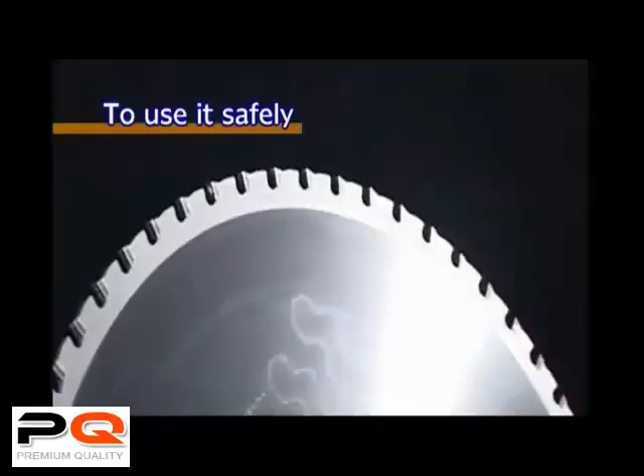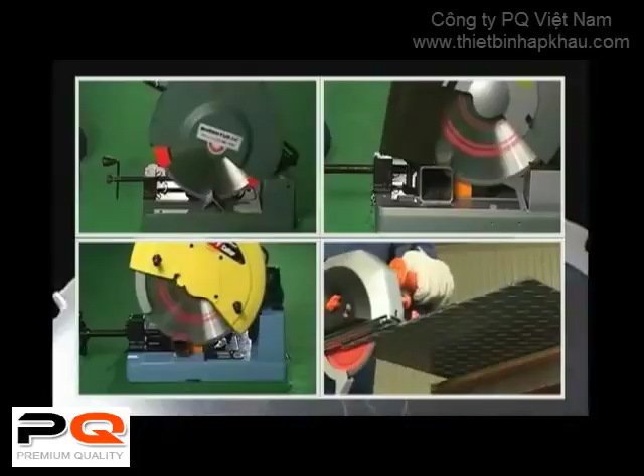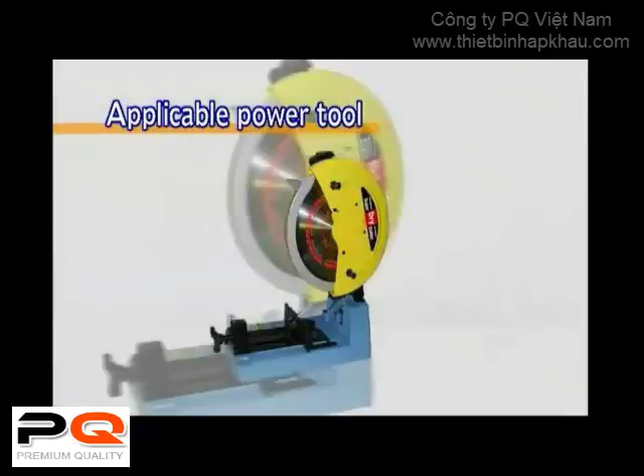And extend its life, please read the saw blade instruction manual and the power tool instruction manual thoroughly. Use the saw blade with applicable machinery that conforms to the outer diameter of the blade and the rotation speed. Power tools specially created for steel cutting saw blades are already produced by several makers.

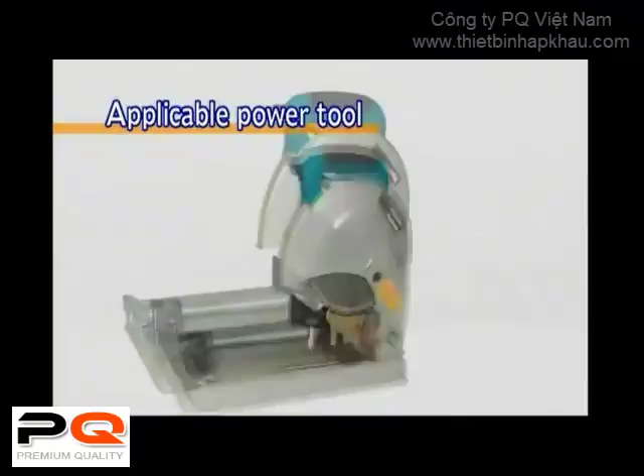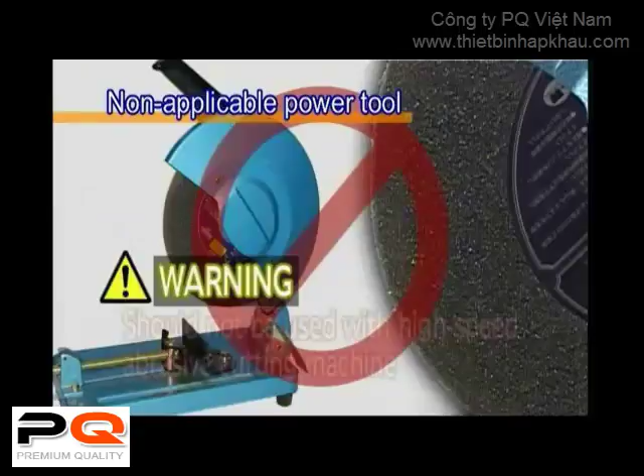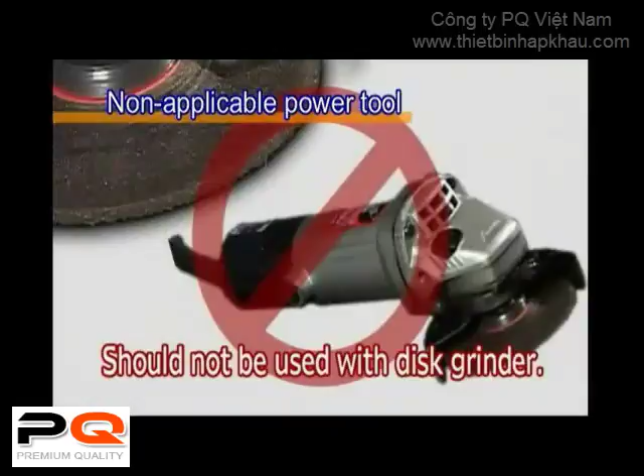The steel cutting saw blade should not be used in disc grinders or high-speed abrasive cutting machines. These machines, in addition to not having adequate rotation speed or output for use with steel cutting saw blades, are not equipped with safety covers or functionalities, and they cannot provide sufficient capabilities. For these reasons, they cannot be used safely.

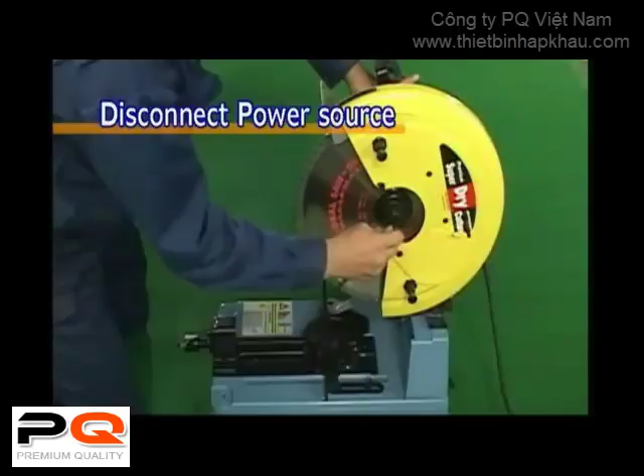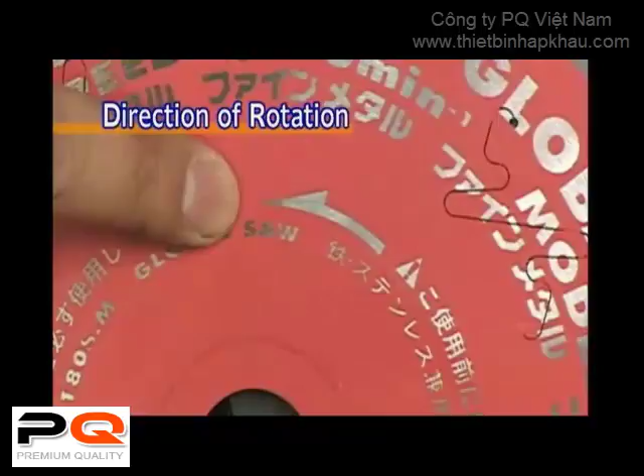When installing or changing a saw blade, always unplug the power tool's power cord from the electrical outlet first. Install the saw blade so that it corresponds to the power tool's direction of rotation, and tighten the flange securely so that it does not come loose.

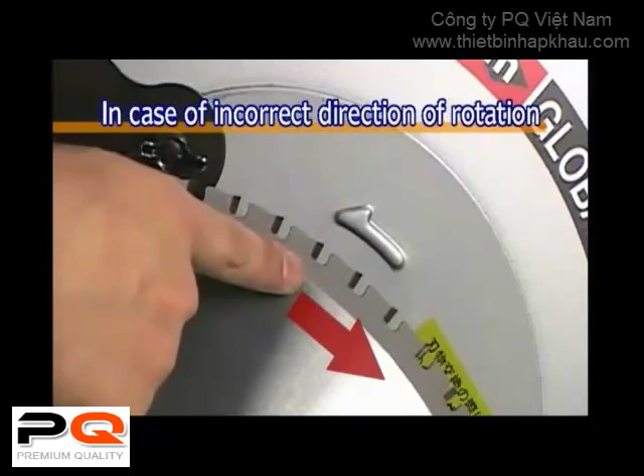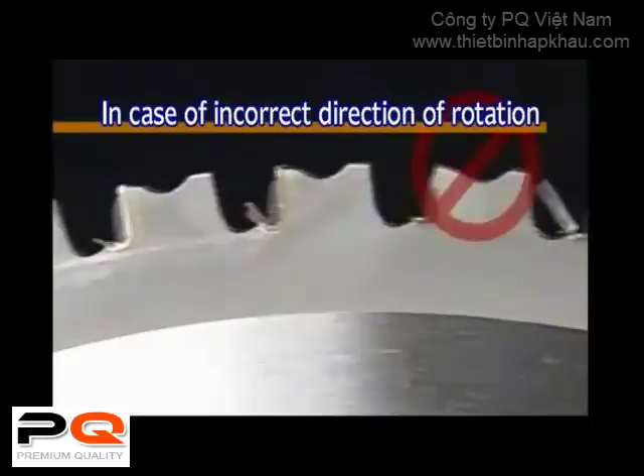When the saw blade has been mistakenly used in the wrong direction of rotation, not only will it fail to cut, but the tips of the blade will all be damaged. Always be sure that the blade is installed in the correct cutting direction. After installing the saw blade, please give it a practice run, making sure that there are no abnormal sounds or unusual vibrations.

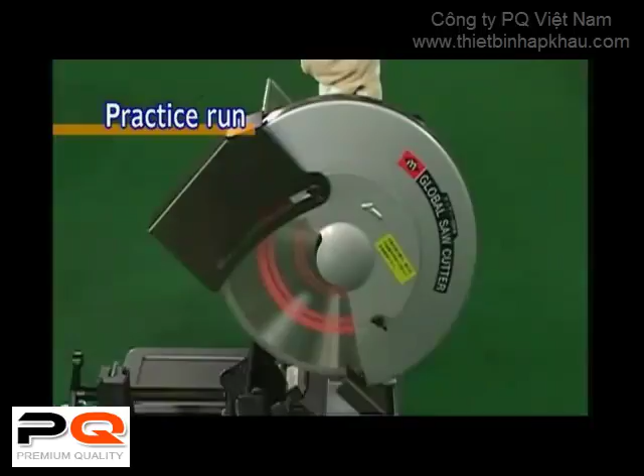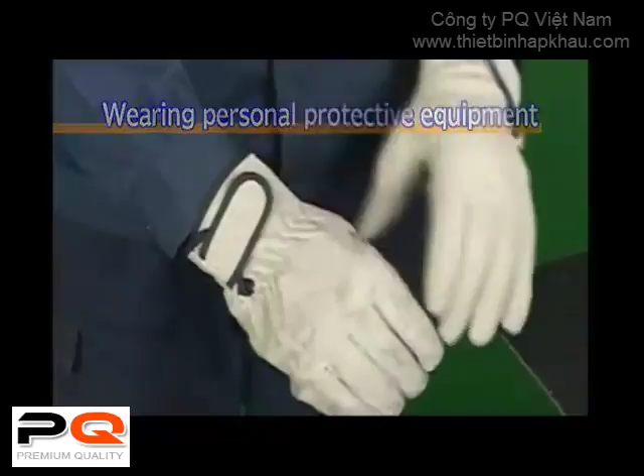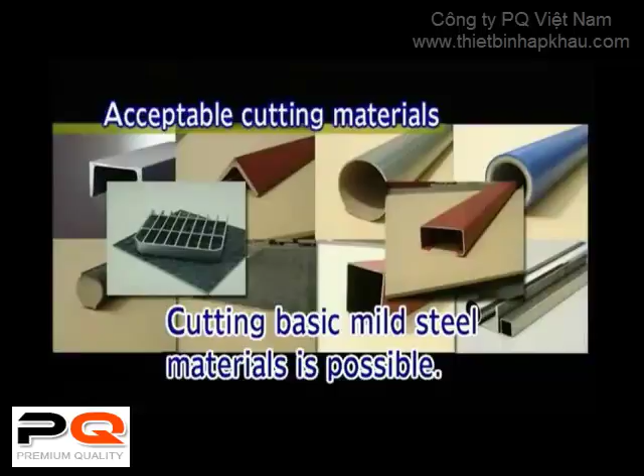For your safety, always wear personal protective equipment. In addition, check your work environment, and do not allow anyone except the operator to approach the equipment while it's in use. The steel cutting saw blade can cut basic mild steel materials. It cannot cut composite materials such as wood, plastics, and non-ferrous materials.

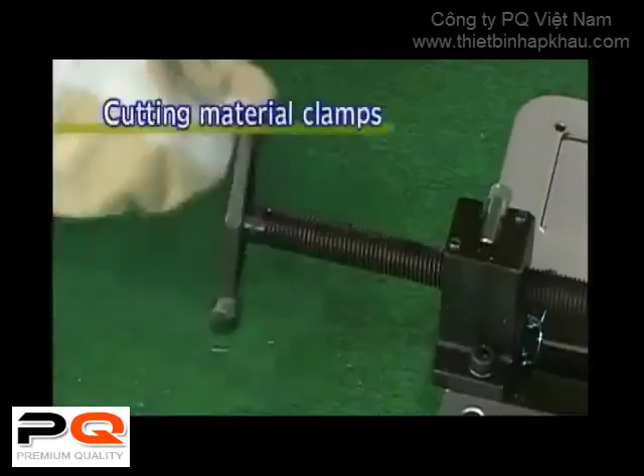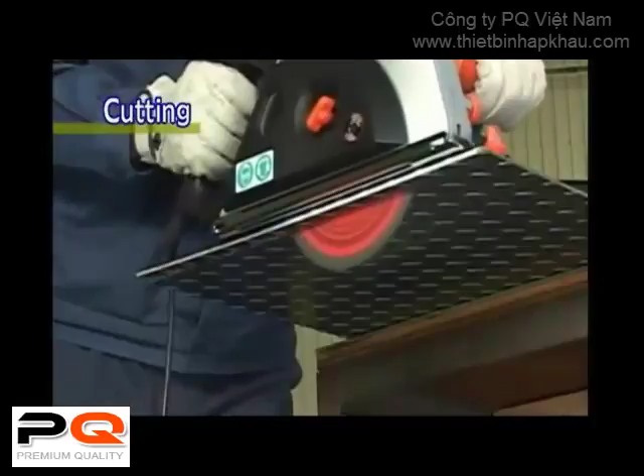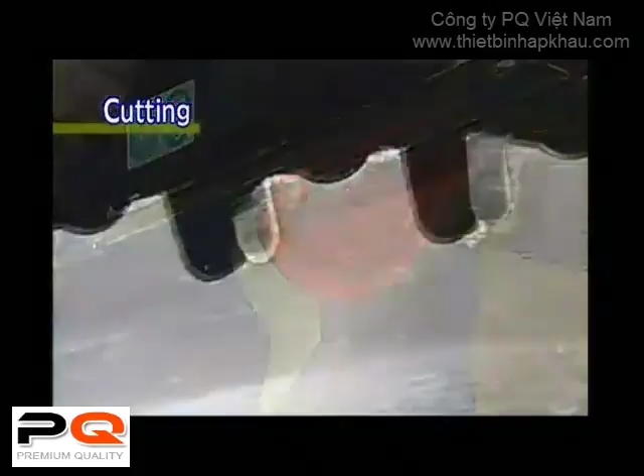Completely secure the cutting material. Please take care while cutting, as the operation of the equipment will become unstable when there is rattling or wobbling, which in turn will damage the tips of the blade and the main body of the saw blade. Begin cutting when the power tool has reached a sufficient rotation speed. There is a high risk of damaging the tips of the blade or the main body when starting the power tool while the saw blade is in contact with the cutting material, or when jarring the cutting feed.

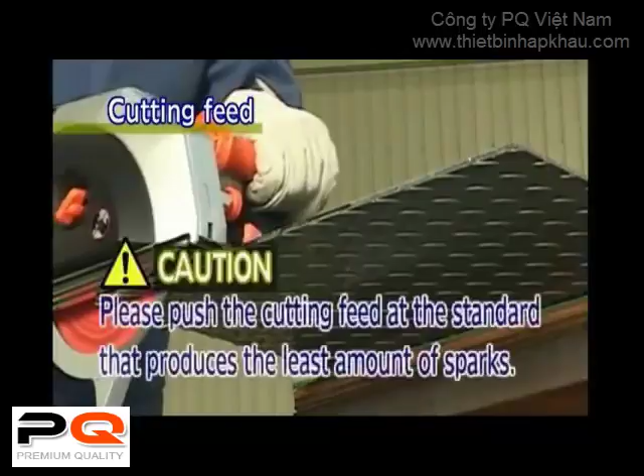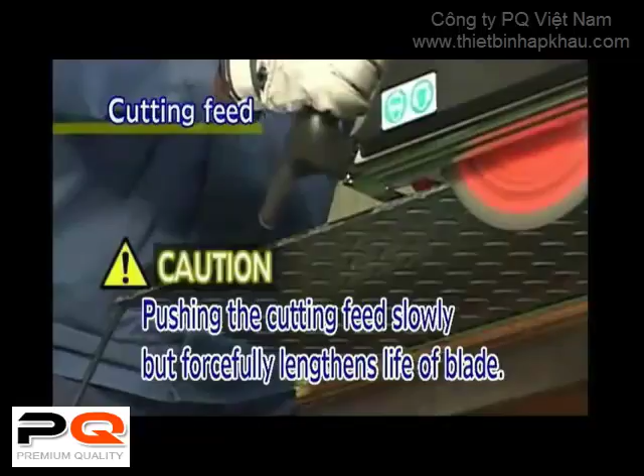Feed slowly until the cutting material begins to cut. Then feed the cutting material at the speed which produces the least amount of sparks. In contrast to a cutoff wheel, there is a minimum of sparks and dust, and the saw blade does not leave burns or burrs on the cutting material. In addition, the external diameter of the saw blade does not grind down, which lengthens operating life and substantially raises operating efficiency.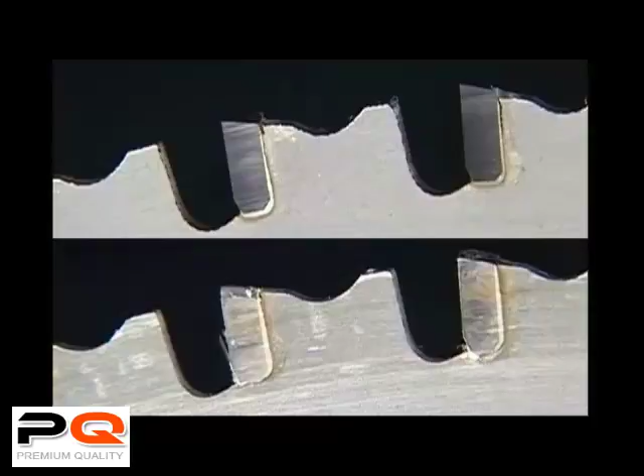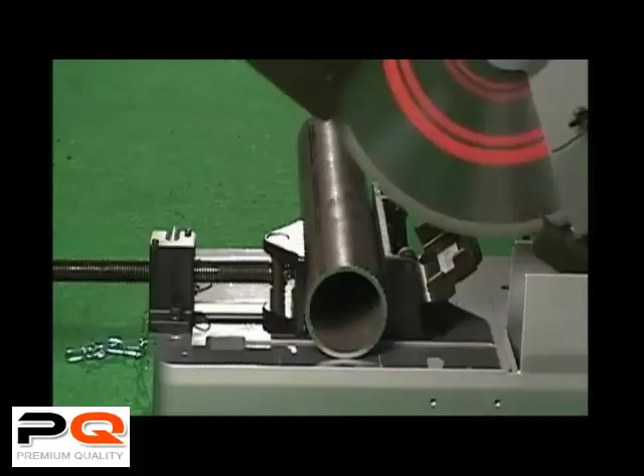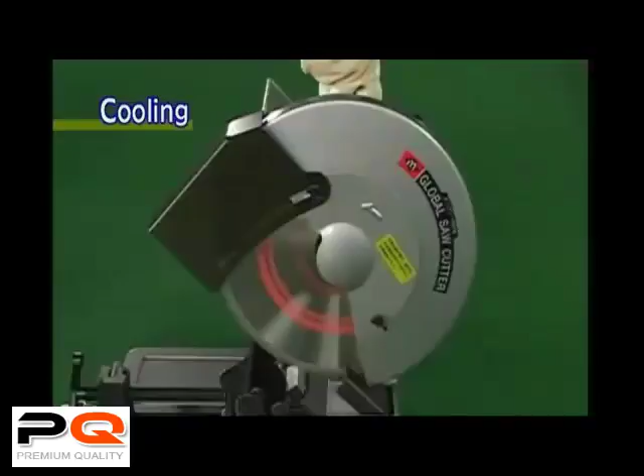A super hard alloy is used on the cutting edge of the steel cutting saw blade. Therefore, chips may occur while in use, but this poses no hindrance to cutting. The occurrence of moderate chipping serves as good self-sharpening action of tip wear and maintains sharp edges. Continuous cutting causes the saw blade to reach high temperatures, quickly dulling the edge. So take frequent breaks to allow heat to dissipate.

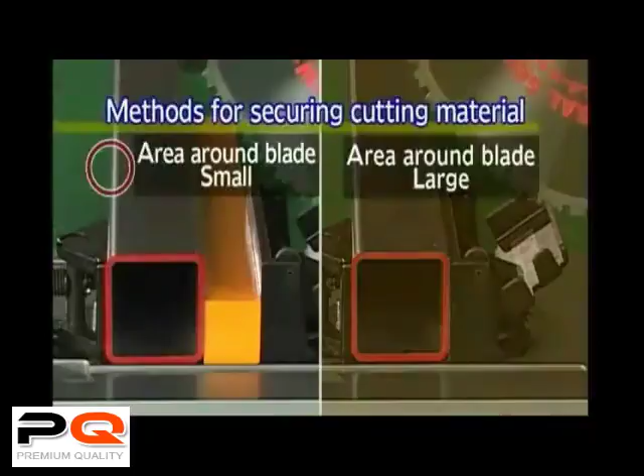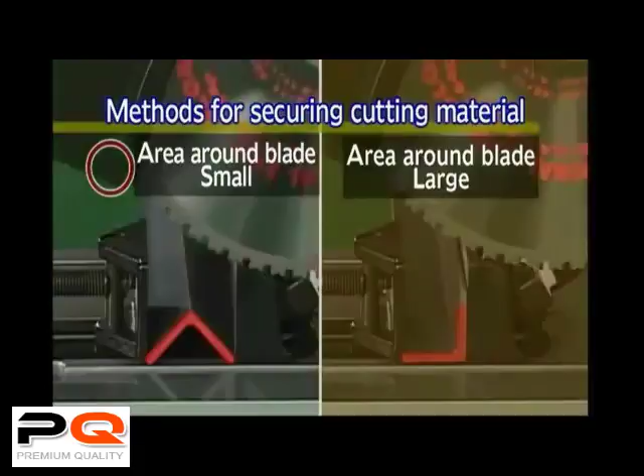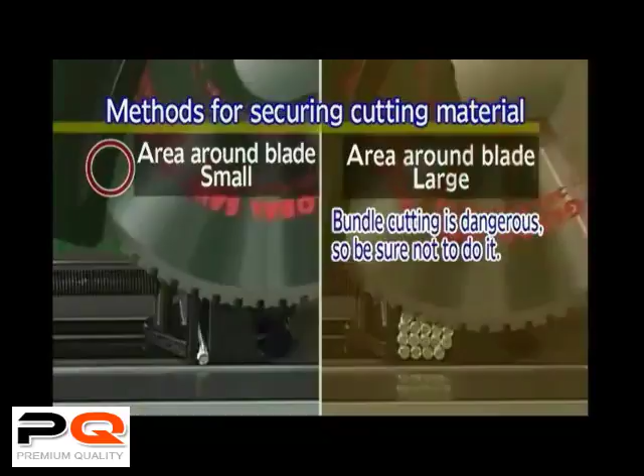Adjust the method of securing the cutting material as appropriate. Minimizing the area of contact between the saw blade and the cutting material raises cutting efficiency, improves sharpness, and extends operating life. Inspect the saw blade prior to each use. Make sure that there is no bending or cracking on the main body of the saw blade, and use your equipment safely.

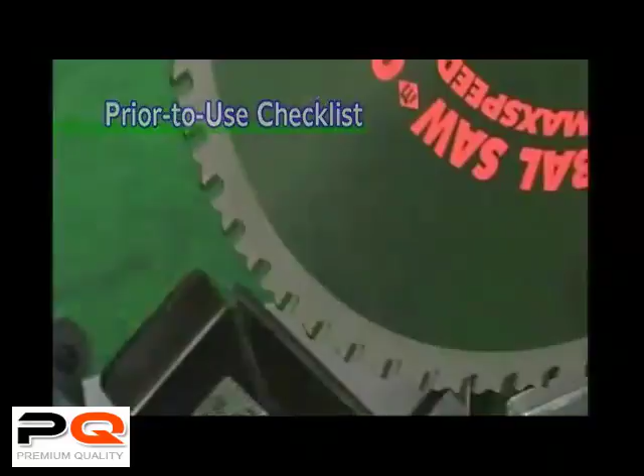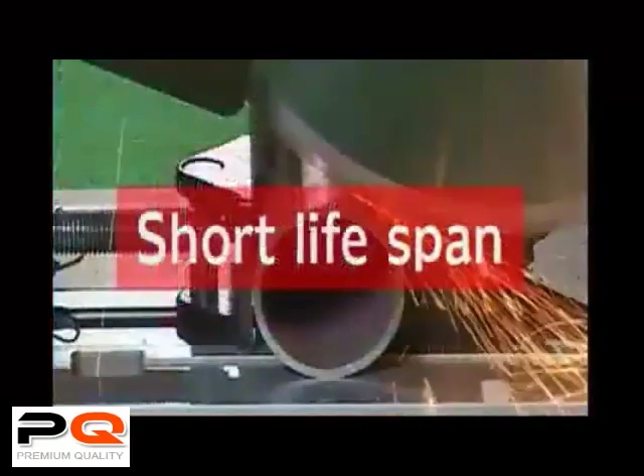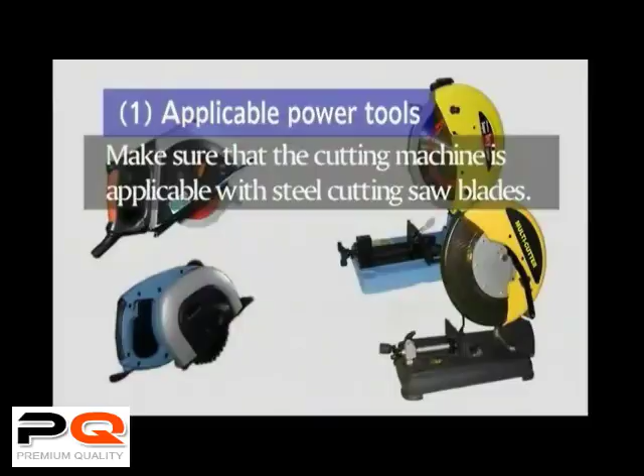Finally, if the following kinds of problems occur when using the steel cutting saw blade, check the respective points. Short operating life. Applicable to the power tool: make sure you are using the steel cutting saw blade with an applicable power tool. Cutting material: make sure that you are not cutting high carbon steel, special alloys, or any material other than basic mild steel.

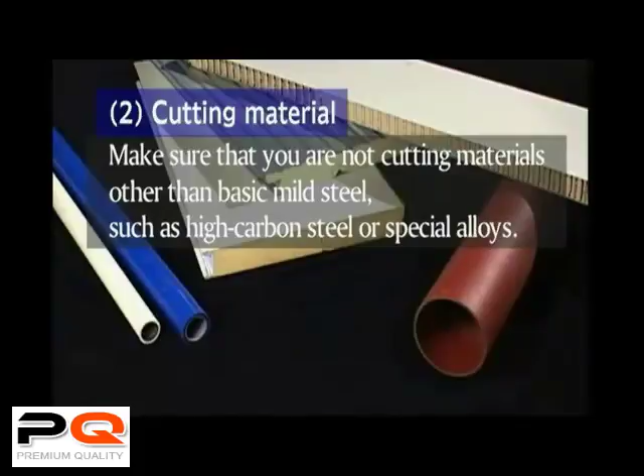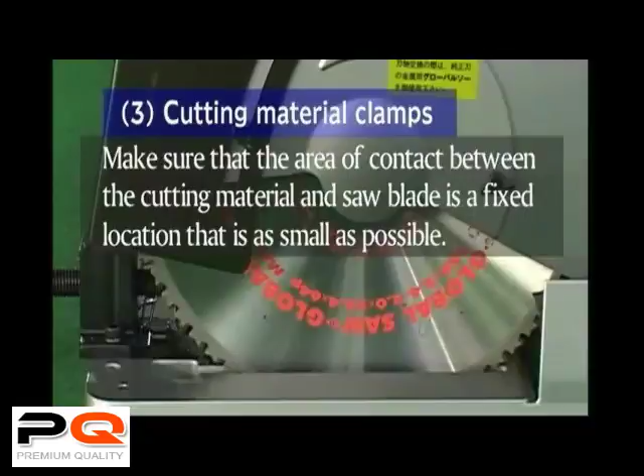Cutting material clamps: make sure that the area of contact between the cutting material and the saw blade is a fixed location that is as small as possible. Cutting feed: make sure that the cutting is occurring slowly throughout the cutting process.

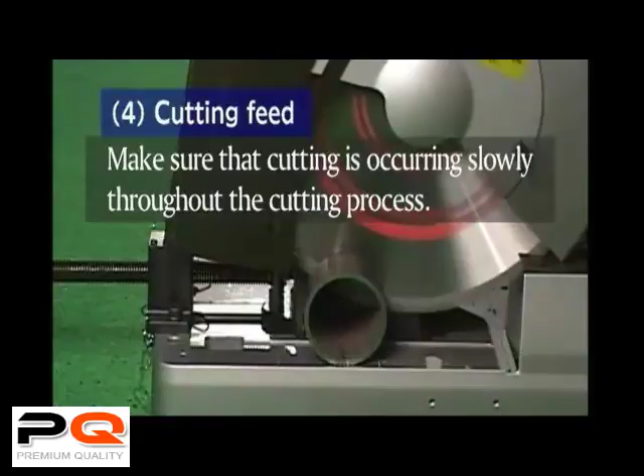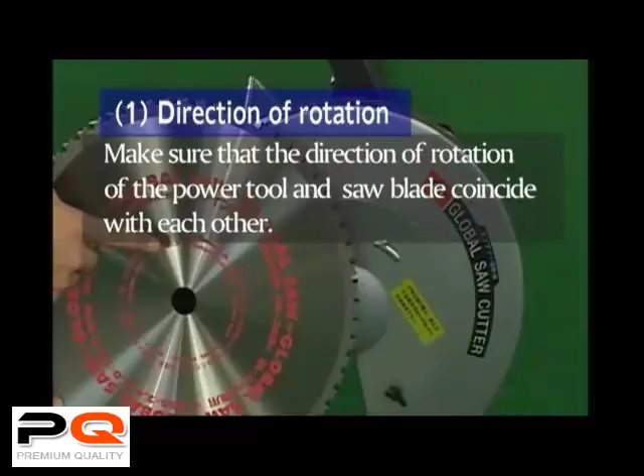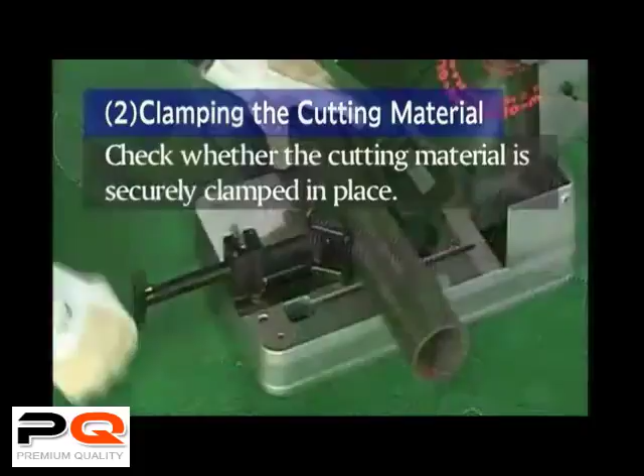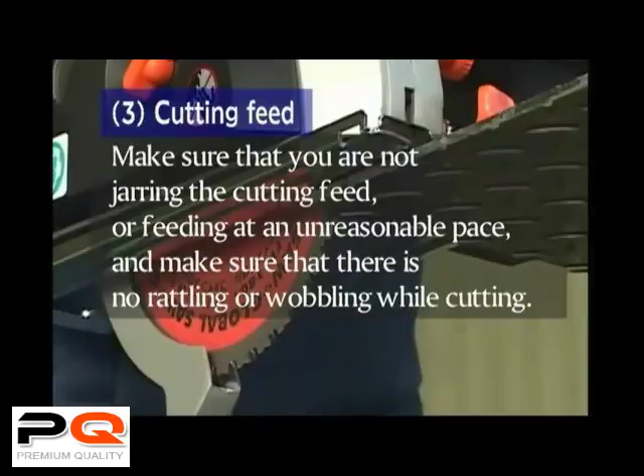The occurrence of chipping. Direction of rotation: make sure that the direction of rotation of the power tool and saw blade coincide with each other. Clamping the cutting material: check whether the cutting material is securely clamped in place. Cutting feed: make sure that you do not jar the cutting feed or feed at an unreasonable pace, and make sure that there is no rattling or wobbling while cutting.

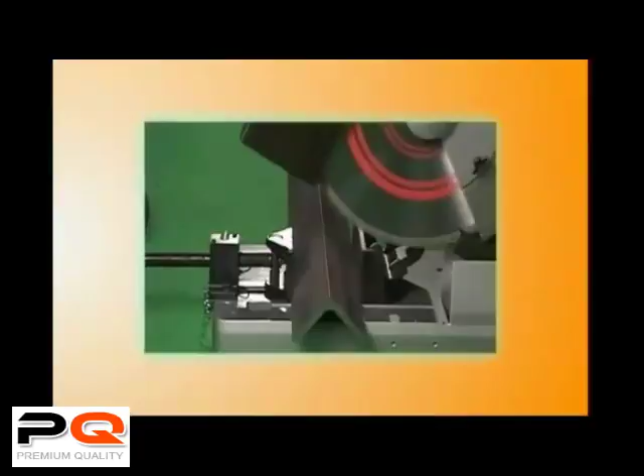To increase the life of the steel cutting saw blade, as well as to use it safely and to raise the efficiency of your cutting work, be sure to fully understand